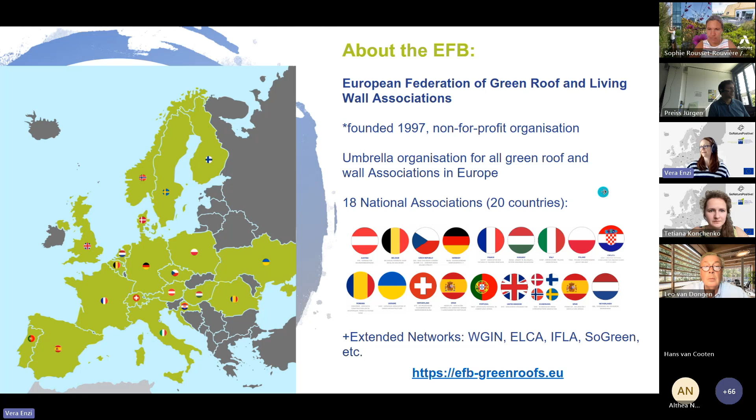So just to remind ourselves where we are today, our host is the EFB, the European Federation of Green Roof and Living Wall Association. This European umbrella organization was established in 1997 as a non-for-profit. Currently, we are 18 national associations covering 20 countries in Europe, with a lot of collaboration with the European Commission ongoing, the World Green Infrastructure Network, our colleagues at ELCA, IFLA, So Green, etc. If you want to find out more about the EFB, please visit our website.

One of the main tasks of the EFB is to offer as much of the great knowledge that we have in our large-scale network as widely and barrier-free as we can. So we are recording today's webinar and we are publishing it afterwards, so people from around the world, not just in Europe, can access it. Today's webinar still, of course, comes along with organizational effort.

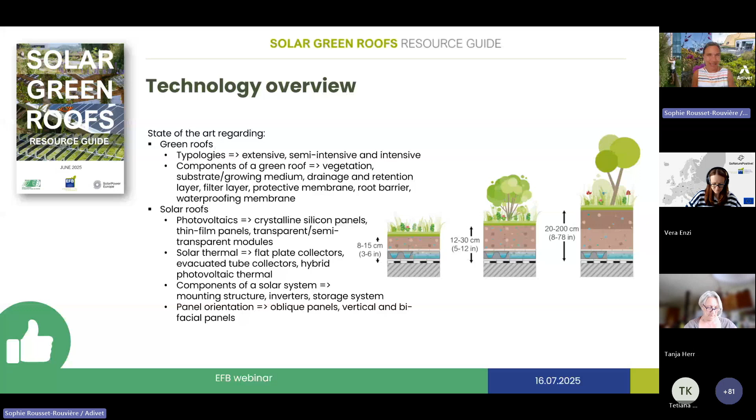As you can imagine, but I prefer to say it, the various benefits concern biodiversity support, energy generation performance, ballasting, integrated fire protection, which is really a key element, energy efficiency, life cycle benefits, ecosystem services, green jobs creation, because of course there are people behind all these technologies, and rooftop food production.

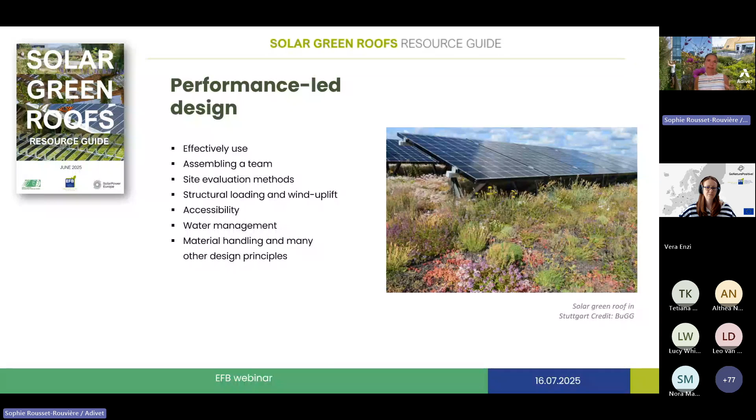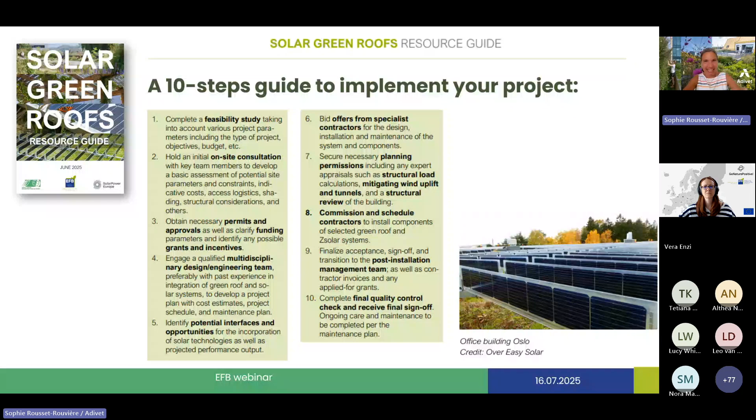So then, as I said previously, even if it is not a very highly technical guide, we'd like to go quite deeply regarding all the technical aspects, and of course layout and installation are key. We didn't want to prioritize the different technologies.

So then we highlight regarding layout and installation, of course, plant selection, panel spacing and height, avoiding mistakes as said in the introduction, because there are some countries, which is not the case in France, that are already pioneers of this solution, with maybe 10 years of experience. So it's very useful to rely on that experience.

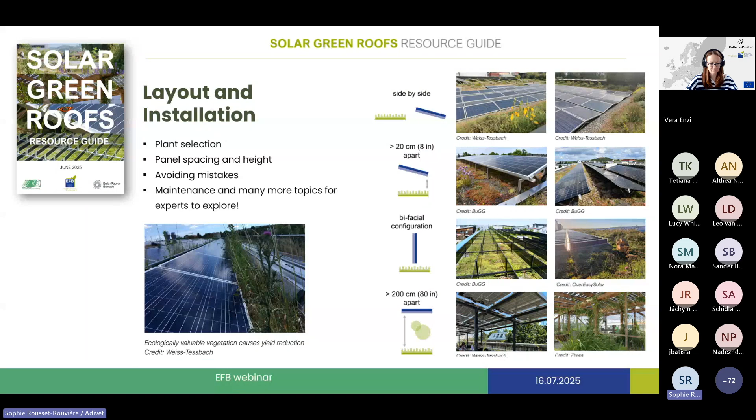And then we address as well the maintenance and other topics regarding layout and installation. We highlight as well the challenges and trade-offs regarding planning, coordination, logistics, because now you have not only a building and vegetation, but other workers coming from the solar solutions, scheduling, physical allowances, and specific retrofitting issues. When you have a new building you have a kind of freedom, but when you're on an existing building, what are the issues regarding retrofitting?

Regarding cost factors and market trends, what we'd like to highlight is the commercial issues, not just to say it's expensive - that's nothing to say. It's to put in perspective what the investment is and what the return on investment could be, as well as the market trends, especially regarding the countries with real experience, to know more about the trends in this market and envisage the future of these technologies.

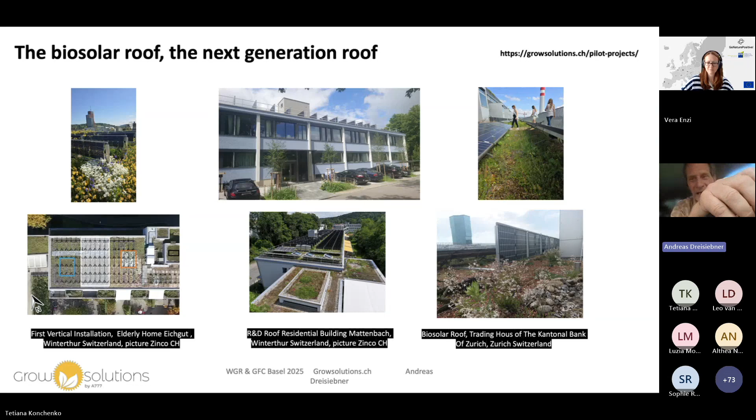You see here, we tested it, and on the left picture in the back, another green roof—it doesn't look like a green roof, but it is one. Many roofs, also in Switzerland, look like these brown ones; they give no labor, not much to do, that's great, but it's not green. And you see ours with a little storage of water, 6 centimeters—you see a completely different scenery.

On the right side, we have a cable car station up in the famous skiing place Flims-Laax. You see we also work on the subconstruction—we want to substitute wood for steel and aluminium to get a much lower CO2 footprint material, using Robinia pseudoacacia. This is the most resistant wood, which we can stick in the soil for the next 30 years without any problem, believe me. It's a neophyte that came with Columbus 500 years ago, but we have it and can use it to good effect.

We have some clients like the Federal Switzerland. They ask how much is the footprint of the installation, and then you have to calculate a lot of things—aluminium, steel, the module, the cables—and we have a little piece we can contribute there. Okay, next step.

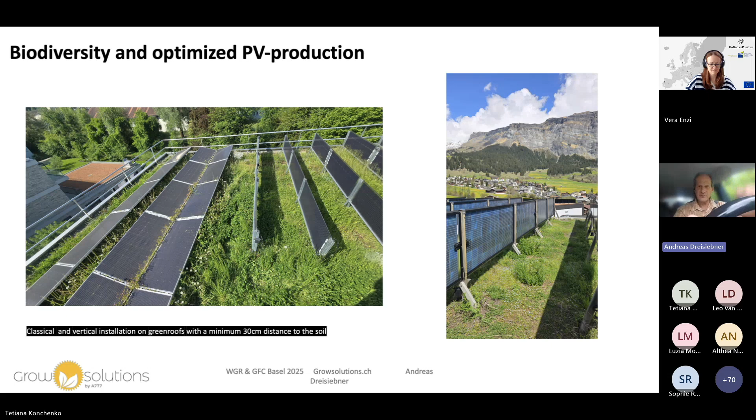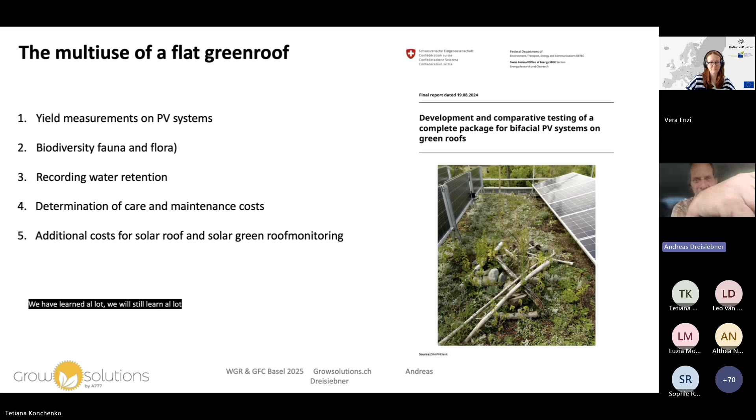Okay, we see here, we go to measure at a really scientist level: PV, biodiversity, fauna and flora, recording water retention, determination of care and maintenance. We really think about the market, not only good ideas, and the roof monitoring. Let's go, please.

If you want the research paper on this, it's available in English and German from my side. I changed my name a little bit from A777 - this is my personal name, shortened. It means three sevens in German. It is how it is. The A is short for Andreas. I changed now to a more useful name: Grow Solutions, because I bring solutions together. That was my idea for changing to the other homepage.

Okay, you see here the situation, what we do on this roof, how we collect the research, how we started the different fields, and we can create the results from it.

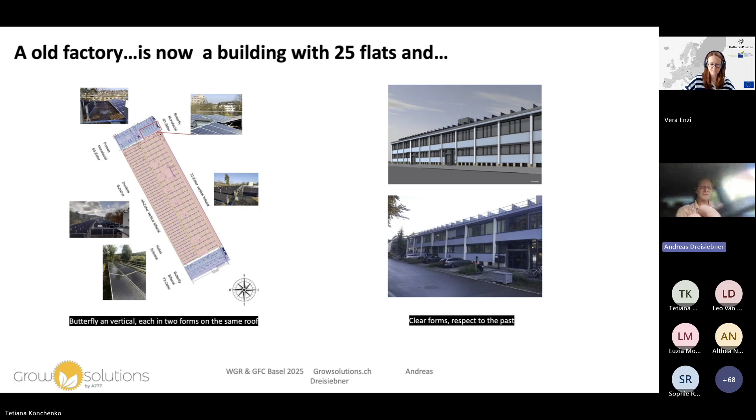You see it was a classical industry building, now with 25 flats inside, done with respect to the old story of this building. Very respectfully made by the architect - we call it done with Fingerspitzengefühl, with sensitivity to respect an old building, but making it really useful for the modern lifestyle.

You see here different types we tested: the classical uses and the vertical ones with smaller modules. We have certain regulations we can go over - we can go over them, but we need a permission, and some things are without permission, you know what I mean. It's always the same with these regulations, we have to find a way that's easier or more respectful to the building.

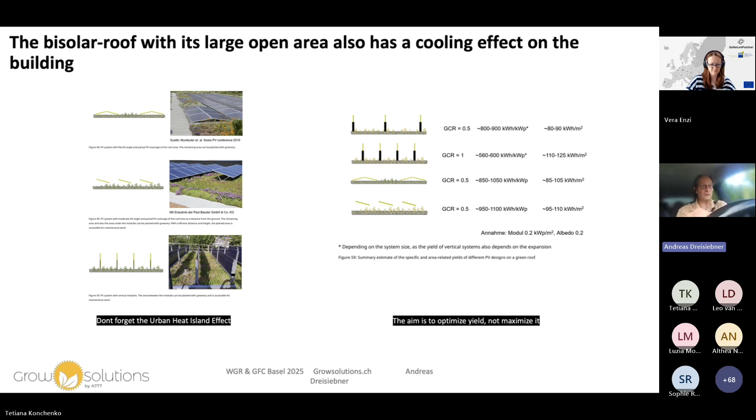It means sometimes it's too high, not really nice. We have pictures of private houses where we don't want to go too high with the modules, but otherwise, like in the industry zones, they don't care about it. It's really nothing special. Okay, good, next.

What is more and more important - we're not talking only about the green stuff, biodiversity, sustainable things. We have to see the reality of the market with electricity. More and more - last weekend in Germany there were 18 hours of negative electricity prices pushed by solar. Yes, a reality. In Switzerland, more and more too, though we are a little bit later.

I hear the same from Armenia and Georgia - net billing. Net billing means the same: they have all the installations done, and the maximum kilowatt-hour production over the year, not looking at the season, just the maximum kilowatt hours over the year. It means everybody is producing the maximum from 12 to 2 o'clock. What the hell will you do with this? A lot of electricity - you see the answer.

With the vertical installation, we have a camel-like figure, like the dromedar. I love dromedars too, but this is the solution - we have to move more and more toward phasing when we use it.

This is one side, the market, but self-consumption will become more important - not only in Switzerland with little houses or in the DACH region, but also in other places. Then you realize, oh, why do I have to produce - oh, I can store it. But storage, like a battery or an accumulator, whatever you call it, is also a costly thing on the resource.

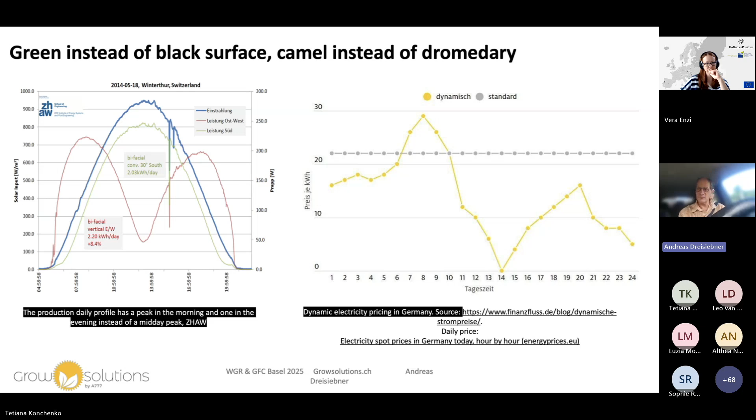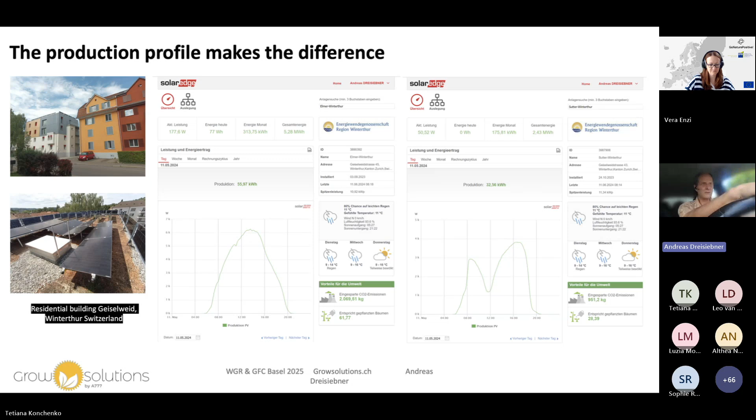We are working on these installations together with the product of SolarEdge. It is sometimes black and white for some people - they say no, and others say yes. We have very good results with them, whether it's something growing up or shading and all the things, especially in the mountains but not only there. Here too we're working very successfully with this technological solution. Please, next.

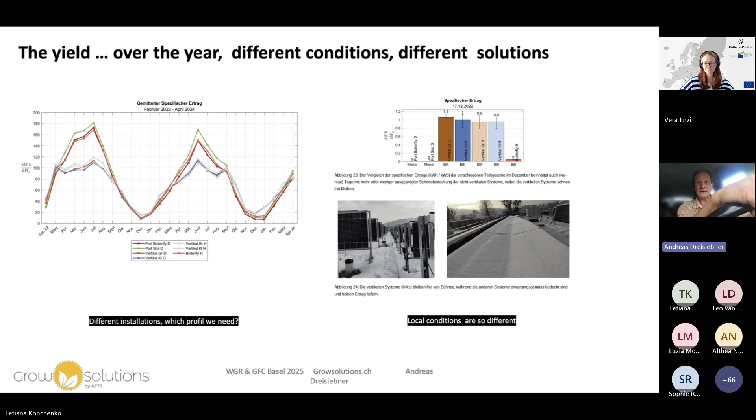Sometimes we have snow in our town too, some days, maybe not 5 days, but we have it. You see the reaction: one system is working properly, producing at a low level in winter, but producing when we really use the power, and the other not.

Then we go up, we have sometimes dust, more and more. We had Sahara dust, also in Switzerland. We have ash from Canada, no joke, it's a reality. I think it will not be less in the next years. And we have snow, I see the picture.

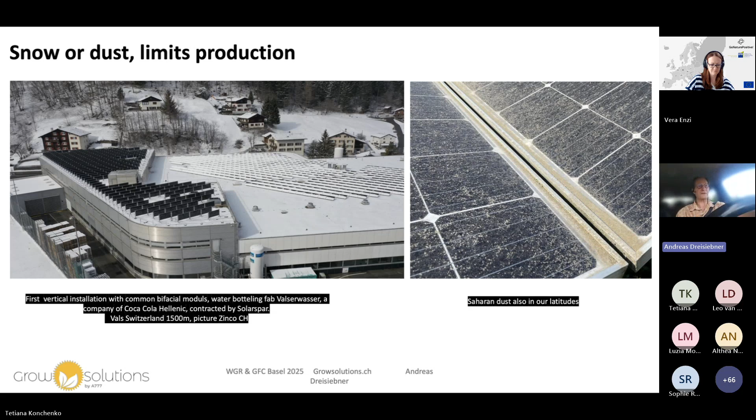This is not a fab somewhere, it's the fab of Coca-Cola. We call it a premium bottled water here, it's called Valserwasser in Switzerland. This water is really good advertising for Coke, they sometimes have an image problem, you know it. But you see here, we produce exactly when the other one is down nearly to zero for some days. I'm not, but it's a good picture to show how it can work. We respect the conditions, to adapt the best solution for the conditions. There is not black and white, we can mix it, but it is another way, and we have to be clever, more smart.

We really go to figure out the biodiversity too. This is not just fancy or something like that, no, we do it properly, to collect all the plants, and we see the 20, and we find after 3 years 70 still. There are some efforts, yes, there are some trees we don't want, we didn't seed, but nature is nature. And we have an interesting result, and how to react, how to handle it with the neophytes. All this is not an easy way, but we do it and we found a solution.

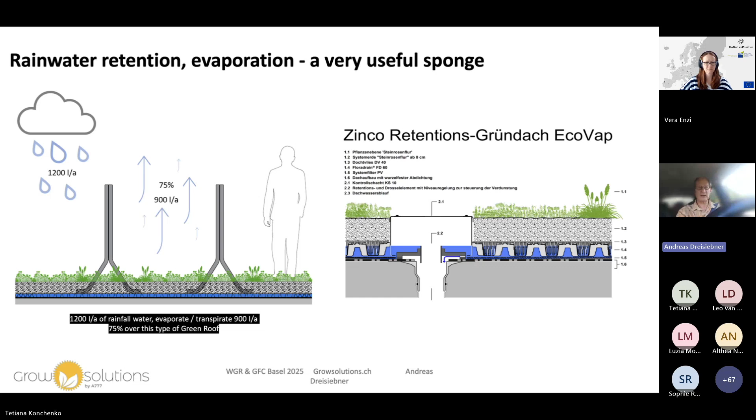The robot is specially made. We adapted 2 classical robots from lawn cutting, they are not working really properly for our ideas. In future we have a robot, it will be ready for the pilot next spring, and in summer we have it marketable, we can buy it. The thing is we have a robot which has a completely separate navigation. The electric field, the DC field, it's not always compatible with the robot's activity, we may have to make it separately.

The second thing is we have a special cutting system. We have a blade system and not a turner, and this is a completely different approach which we are doing. And we cut it much higher.

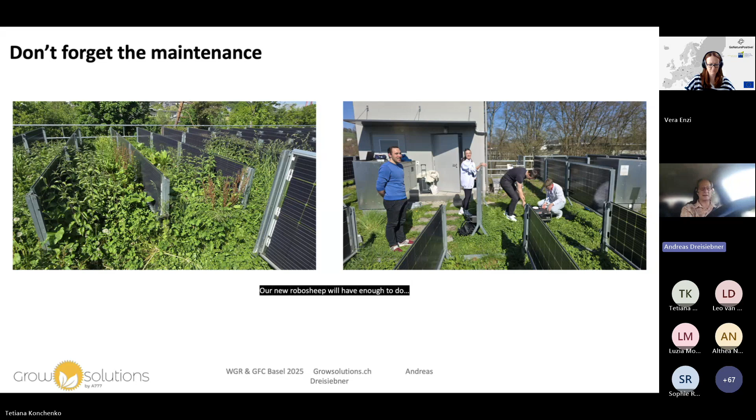We have to find out what happens when we cut it on 15 centimeters. We give like a cushion over the soil, a mattress with green, but we don't know what happens with this green, which type of plants will love it or survive under these conditions with these selections. But we don't let it grow higher, so we have as less influence as possible on the shading to the modules. You know it from lawns, when we cut it too deep in summer, it dries out. We have to cut the grass longer, then it's shading the soil, and it stays green longer than brown.

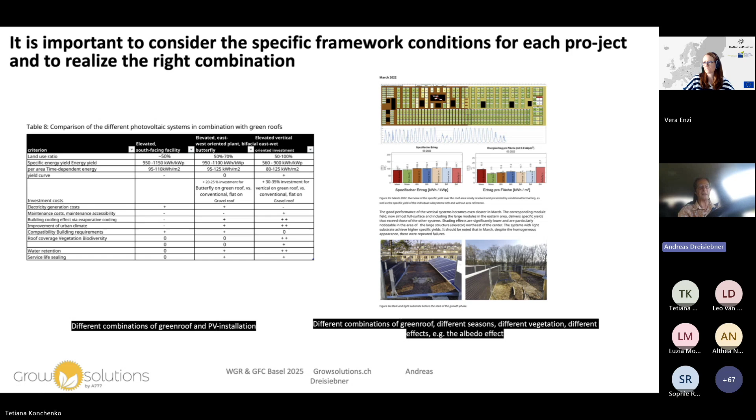Then you see here a little bit from our testing, how we combine these different types of green roofs with this PV and green roof on the same place. What's the result? If you want to see it, you can check this test, the final report. I told you it's over 90 sites.

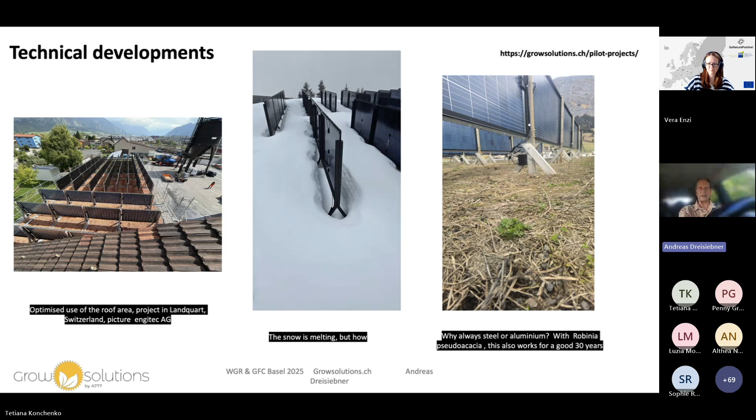We say we have an influence of 3 effects on production. It's the direct light, meaning the shading. Second is indirect light, and the albedo effect. Snow is the best natural reflector to the modules, especially in wintertime.

And you see it's a good brother or sister to solar, wind, to have more production in wintertime when you have less from solar.

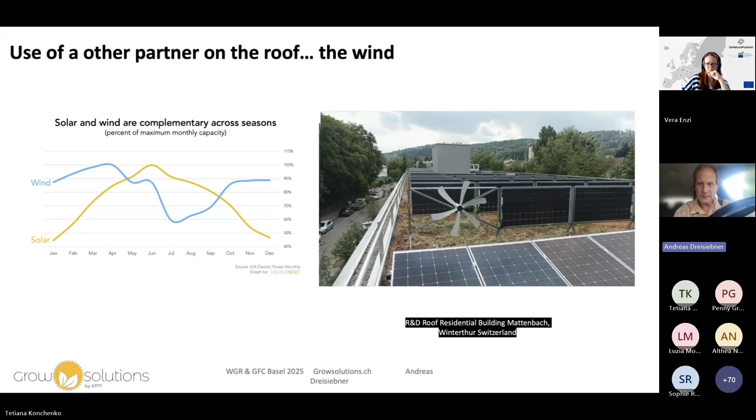You see here a little curve. With very little wind on the right side, it jumps up. When it has enough power, then it's really turning. Double the speed means 8 times more kilowatt hours. It's another game—wind and solar, you cannot compare them directly.

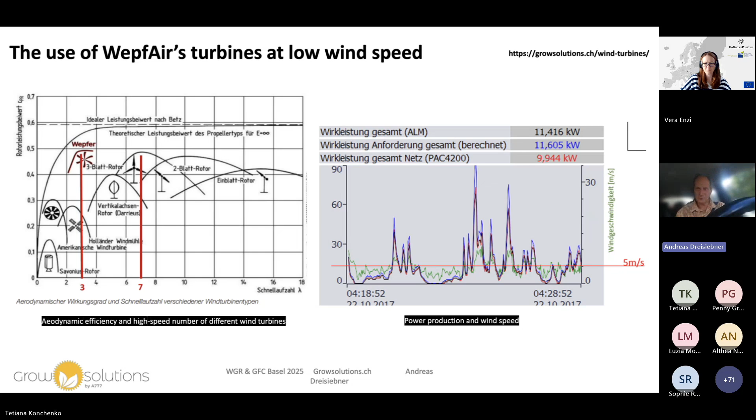Not going to tell you more—if you want to know more, you know my address. Thank you, next picture please.

Why not combine it in urban conditions? Come on, urban gardening, absolutely possible. We work with biochar—we have to be careful if it's growing too much sometimes, but for such use, why not? In Switzerland we have something called Perche et Légumes, in the French-speaking area on the lake of Geneva. They make fantastic solutions with vegetable gardens between the vertically installed modules. Why not? It's absolutely an opportunity for your project.

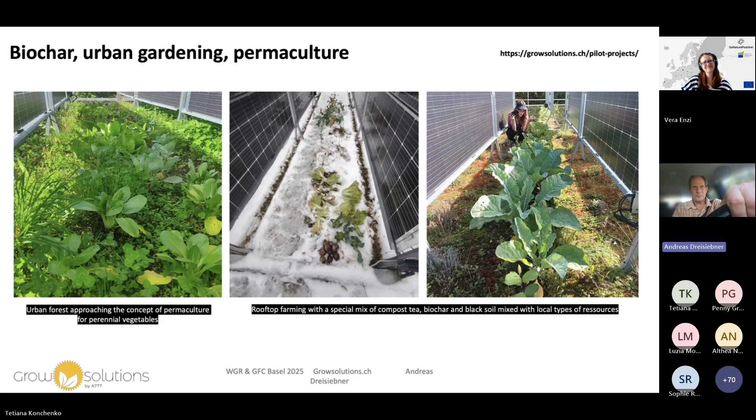Yes, and sometimes it's also a question of design—why not black modules with black substructure? You see it, they look good for the taste in this same area, the skiing area of Flims Laax, and in the back it's like a space.

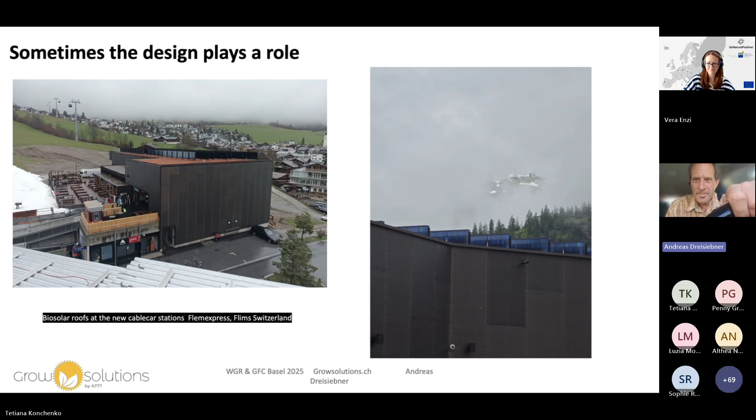Yes, these are our partners, different partners, big ones and small ones. And we are supported by the Ministry of Energy for this solution, and our research partner, the Applied Science University of Zurich.

Yes, you see here we have visitors from all over the world, and these pictures are from Ukraine, Austria, and Germany. Yes, we are open-minded, we are researchers but also makers. We love to make things if that brings us fast progress to realize good examples and adapt to your conditions and circumstances. They are a little bit different, we have to respect that, but we know how we can do it together with local or national partners. Vera was telling me we have a test installation in Yakutsk in Siberia, and we have installations in Kyrgyzstan and Armenia. We hope soon to have others too, to show it's not rocket science, it's a really useful technology for other conditions when combined the right way.